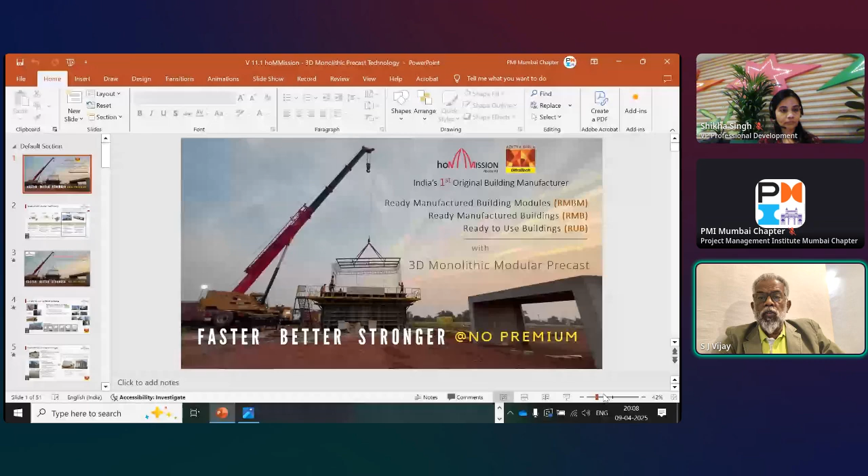Yeah, there we go. So like I said, my name is Vijay, and I am part of this company called homMission India. Those of you who are able to see the tiny font underneath that, it just says two words: it says 'abode all.'

Essentially, we believe someday we should be able to manufacture all types of abodes and ensure the people, or the activities, or anything else that happens on earth will have an abode which is manufactured, intelligent, etc., which you will see as we go forward in the process.

When we started this in the country, in India, we were doing this from 2010 onwards. In 2010, it was only effort, study, comparison and research as to what kind of manufacturing technology would work for the Indian market. Those of you from the construction industry will immediately know that if we talk about manufacturing buildings, we only have three options as of today. In 2010, we had only two options.

The two options were either what is called prefabrication of buildings or precasting of buildings. The difference is that in precasting you use concrete, while in prefabrication you use metal, timber, or any other material. These words are used interchangeably in some markets, and even precast is referred to as prefabricated. But we differentiate by saying if it is concrete, it is precasting, otherwise it is prefabrication.

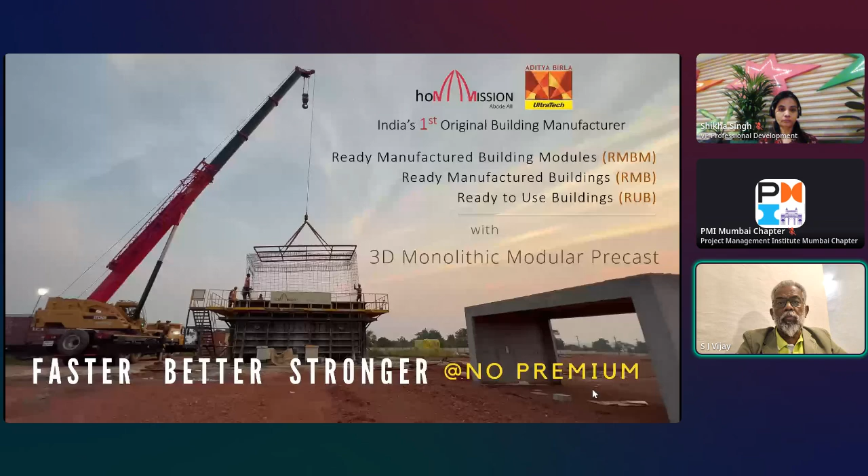So whatever I have told you is only level 3 and level 4, as you can see on the screen. The construction industry has been evolving from using raw building material, mixing them at site, making the walls and adding the roof, etc., until about the Second World War time, or until the invention and usage of reinforced cement concrete.

That's what people were doing. Even when cement concrete came, it was still site mix, done manually with available labor. Then, historically, came the Second World War - things being bombed by the enemy made it compulsory that construction had to be precast or manufactured. So it triggered in European countries, particularly countries like Finland, which became leaders in precasting.

You can make multiple wall panels, columns and beams, and join them together - we call it segmental or 2D precast. Now, whatever I told you in the first slide itself is level 3 and level 4 - that is exactly what we do as homMission in India. We call it homMission. The mission is to make a home available not only for people, but for activities, industries, airports, whatever.

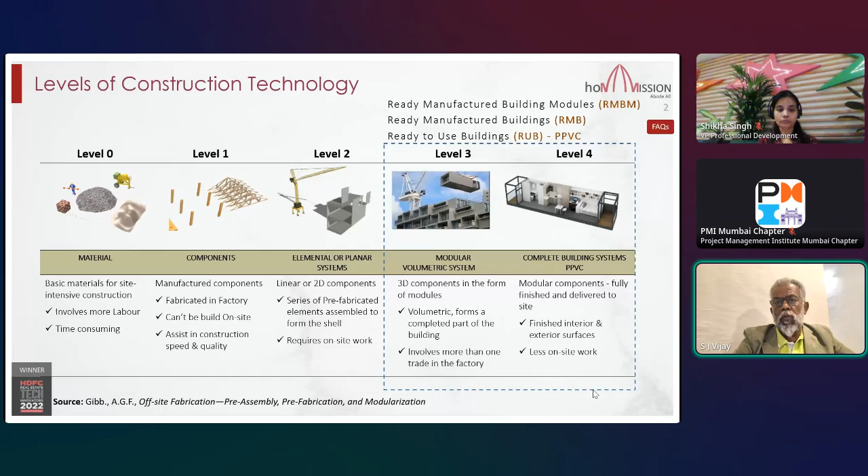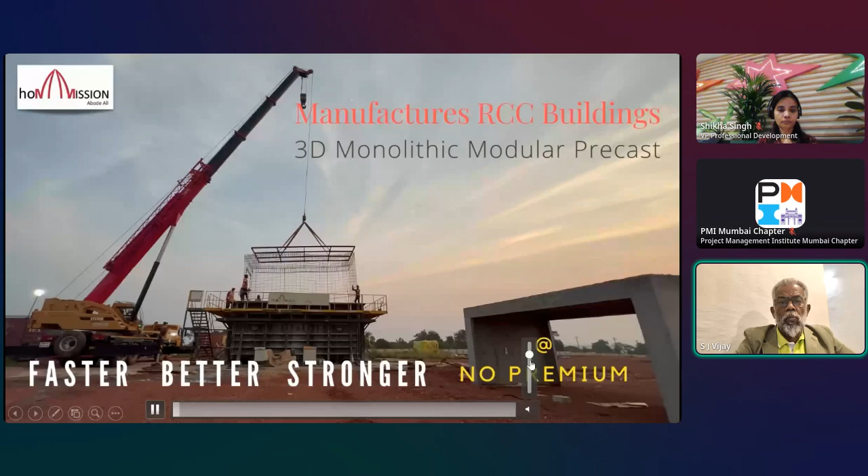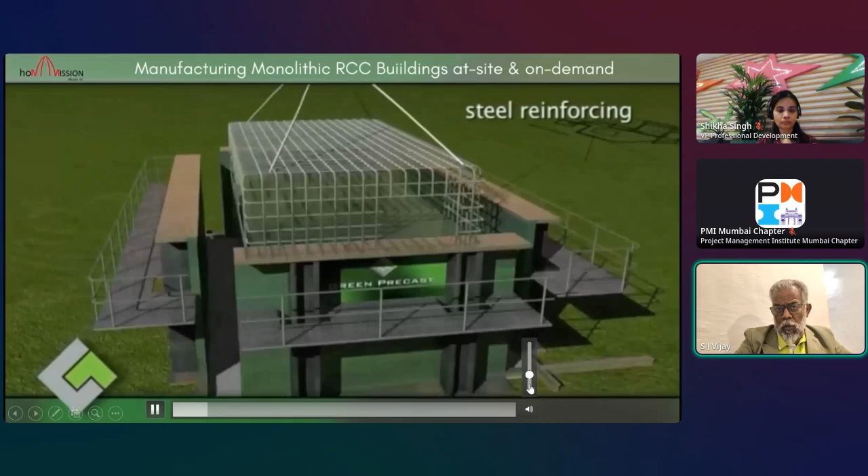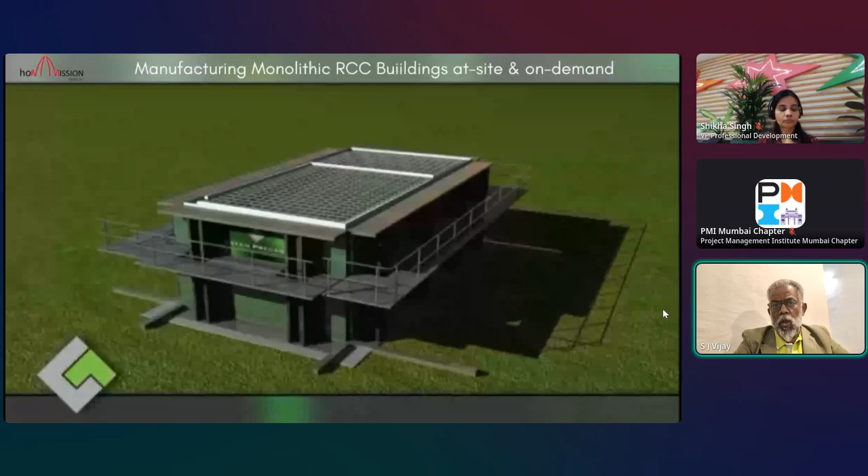So as you can see in the picture, this machine which manufactures the building can go to the site - that's the big machine. Push a remote control button, all four doors open. You lower the reinforcement cage and put in all the mechanical, electrical, plumbing conduits and wall boxes, whatever has to be in the room, including a fan hook if required. Check against the drawing, put all of them in, push the button, close the machine, pour the concrete.

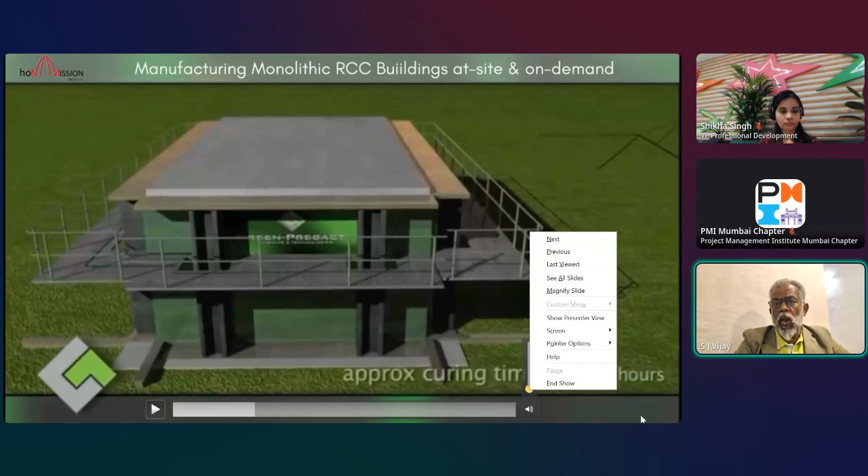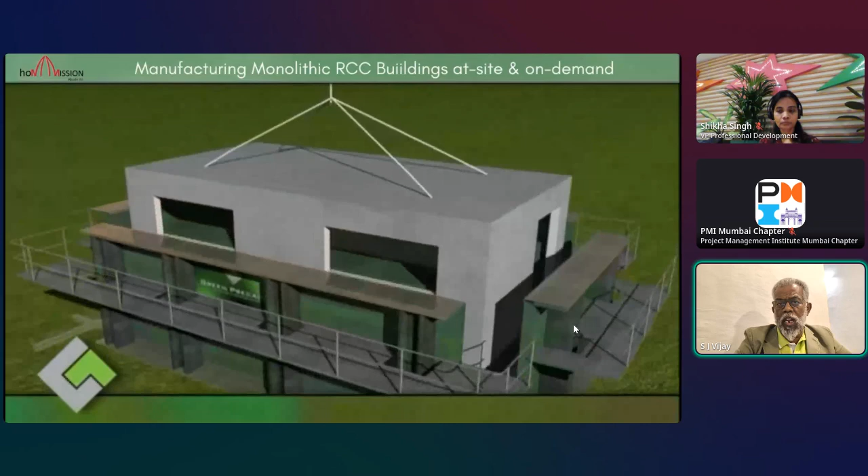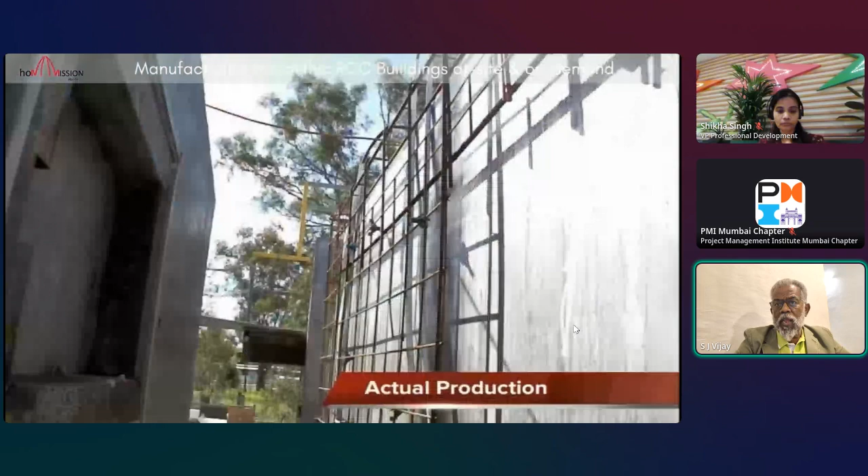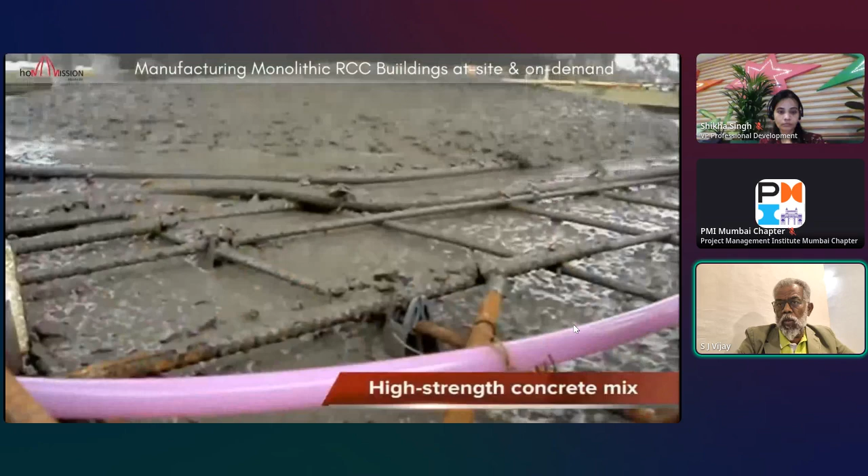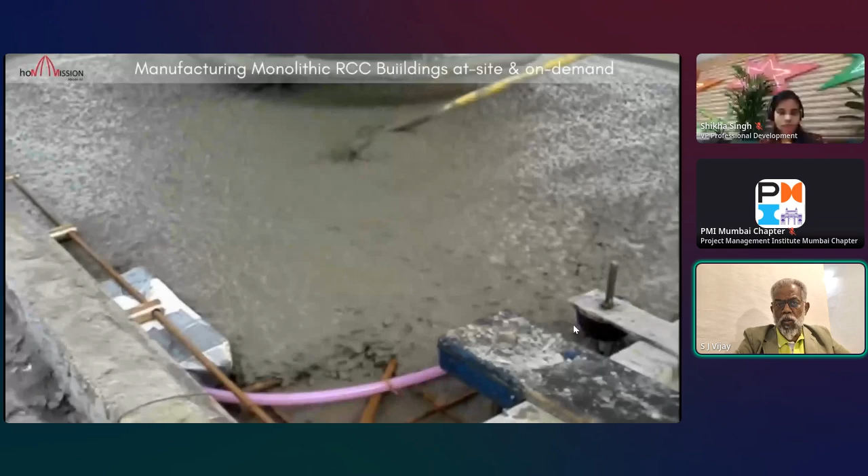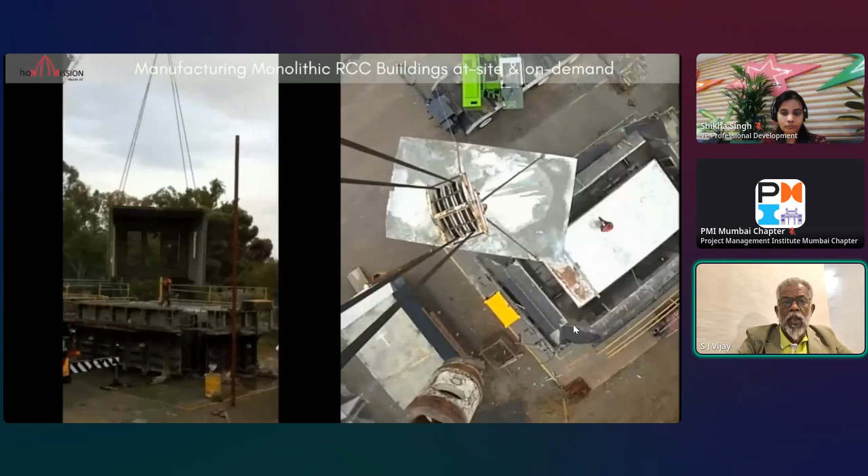On the left hand side, you can see if you need a larger space, we can keep one side of the module open, join two of them together to get double the length. So we have applied these things.

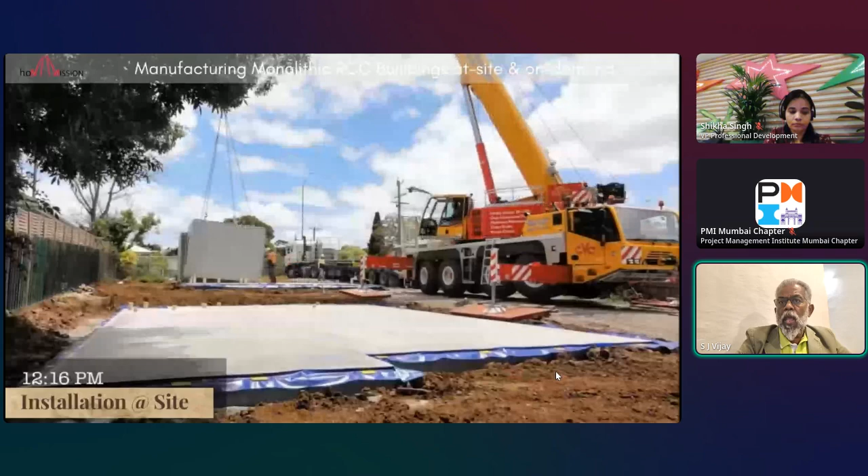Now that is manufacturing, this is about erection. How quickly can you erect an RCC building? 10 modules, roughly 3,500 square feet in total, about 5 hours and some minutes.

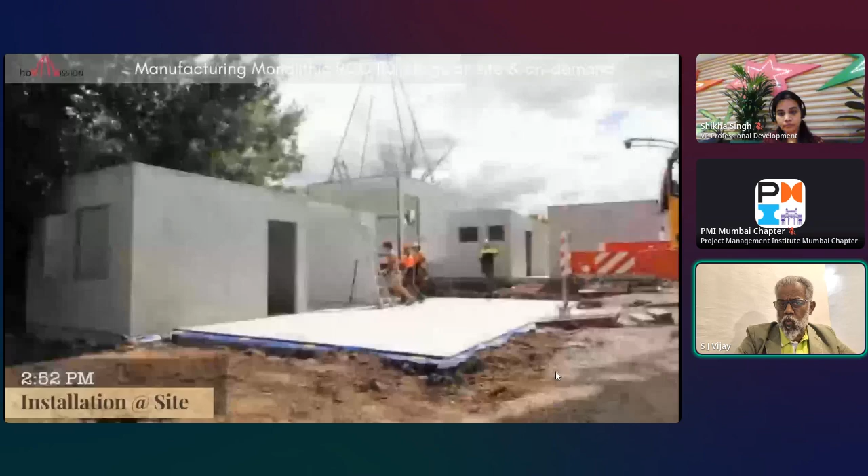This is a video clip of how it was done in Australia. This includes the structural connection. This is India's first building, 5-story, 20 apartments, built in 33 days. This is a large conference hall, done with one machine. This was done for the new Goa airport. So this is a quick 1 minute snapshot of how it is done.

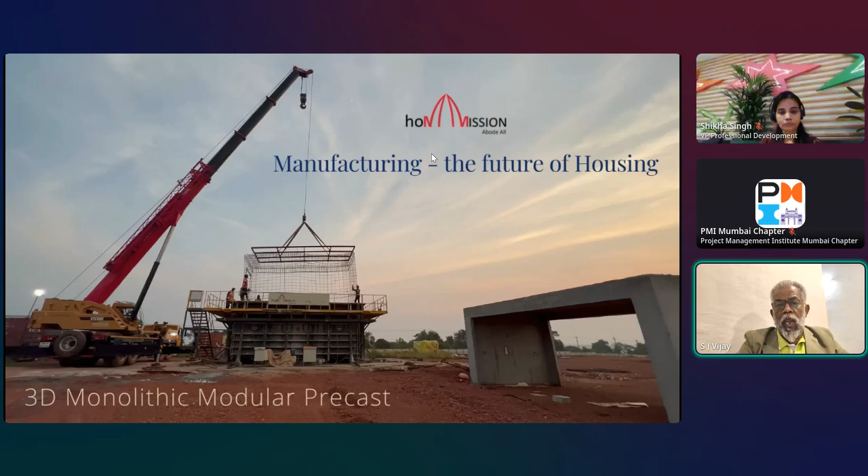All this sounds great, but the fact of the matter is it may have been in use in other parts of the world since 1997. Singapore made this technology mandatory in 2011. All this is fine, but in any country, when you bring a new way of creating a space, it obviously has to comply with the National Building Code. It has to be studied for the local geoclimatic conditions and the seismic forces.

So that took, in 2016 we did the first building. It took us about 3 more years. Government of India set up a committee which involved CPWD, Central Public Works Department, Indian Institutes of Technology, Central Building Research Institute. That committee said it is the same steel, same concrete, but I need to check the structural connections to ensure it is safe.

So what you see on the slide on top is the entity which led all this effort and approved this for use in all types of buildings, manufacturing all types of buildings and all heights of buildings in all seismic zones up to seismic zone 5. This is in the public domain. I've added it in the presentation. You can take a look at the circular issued by the Government of India.

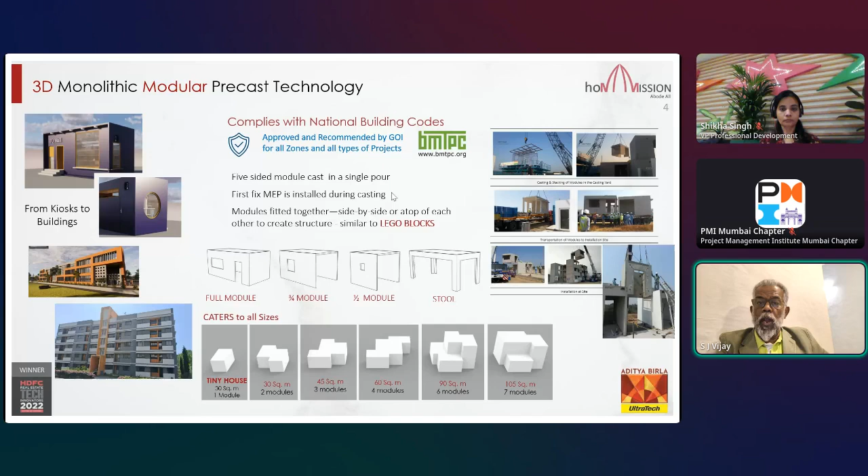We will go into the micro factory, how we modularize the factory also. Next one, Sunil, please.

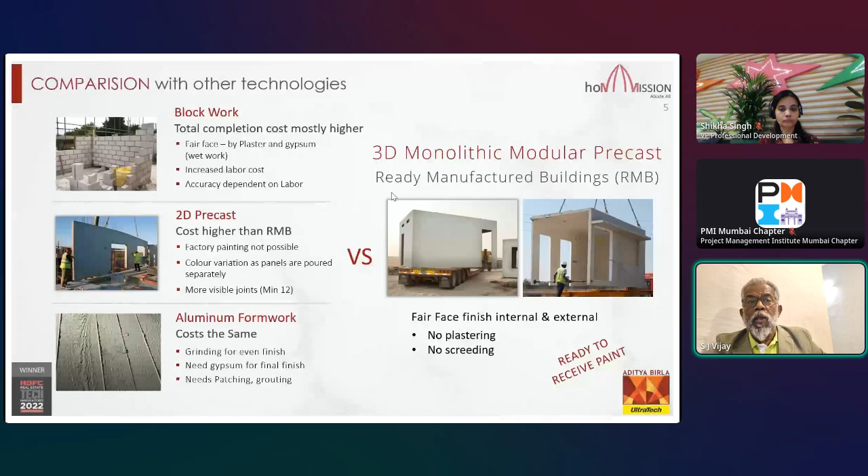So, let's go to the next slide, please. So the question is, what small rooms can you manufacture? How do you manufacture a large room or a conference room? You can see this is a

1,716 square foot single conference hall. Those of you with a sharp eye would have already noticed, if you look at the picture in picture, these were manufactured as standalone modules, all from one machine, over 6 days of production. As you can see, it comes with wall boxes, and later we draw the wire. 6 boxes manufactured over 6 days from one machine, joined together - that is your conference room sitting in front of you.

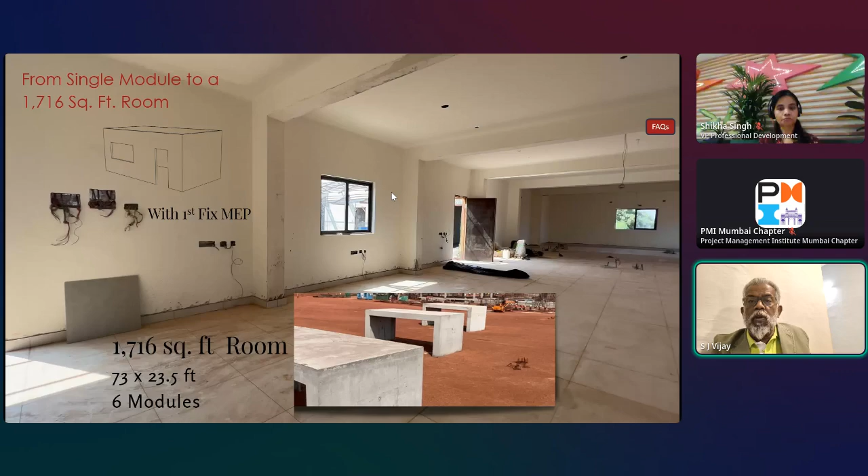Next one, Sunil, please.

So obviously the question is, this is all fantastic, but if you say I'm going to manufacture this at your site, how much space is required? For manufacturing 300 square foot, one machine plus steel processing plus holding takes 2 days of production. For all of this, if you see the left-hand box, we need 20 meters by 20 meters of space. That is why we call it a micro factory. In a 60 feet by 60 feet space, there's a building manufacturing factory that sits at your place and manufactures

whatever you need. But if you say I need 1,000 square foot every day, then you can see there are 4 of them sitting there with a gantry crane. All of this is mobile - these molds come on the back of a trailer, come to your site, do the factory work, get back on the trailer and get away. That is why we call them mobile micro factories. So now let's go.

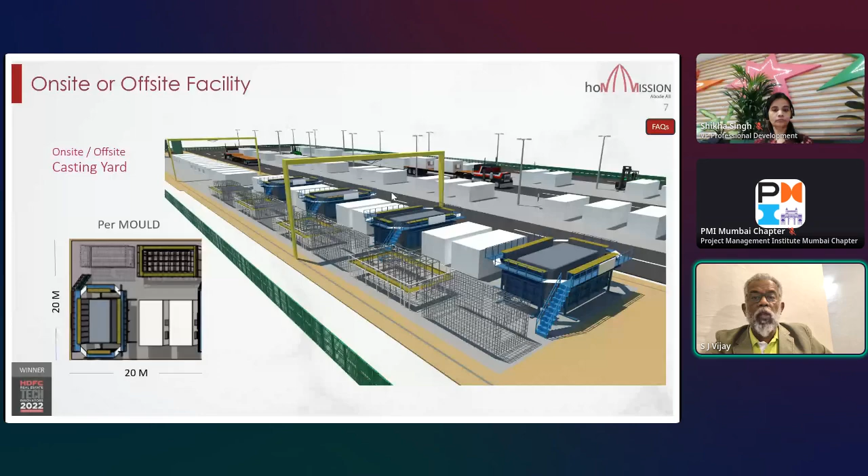So this was India's first building, I told you, for Tata Housing near Mumbai in a place called Boisar. This is a 5-story building, 20 apartments. As you can see, done in 33 days. This was done in 2016. This is what was the trigger for doing all the subsequent projects you will see.

Next one, Sunil, please.

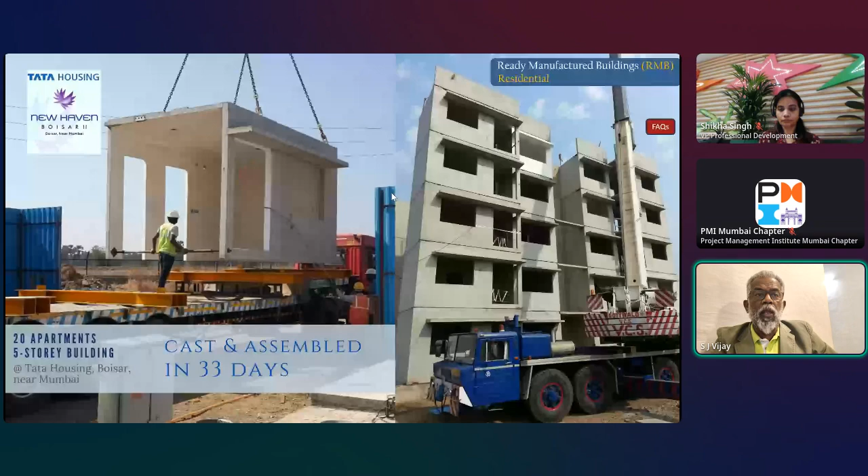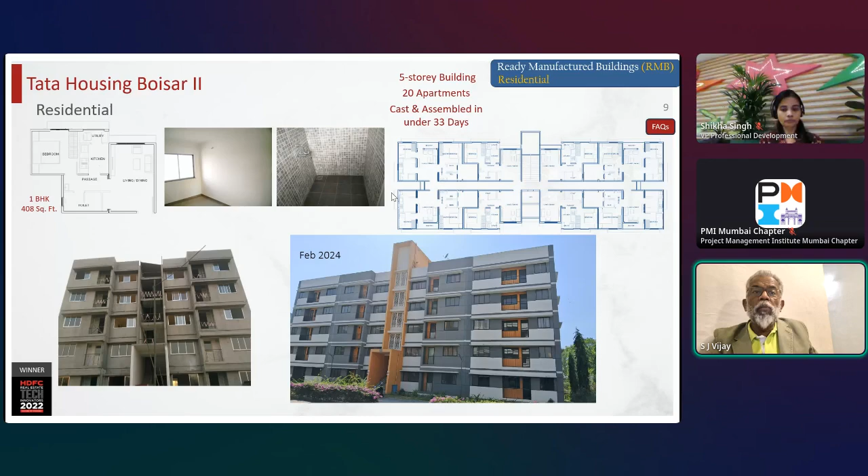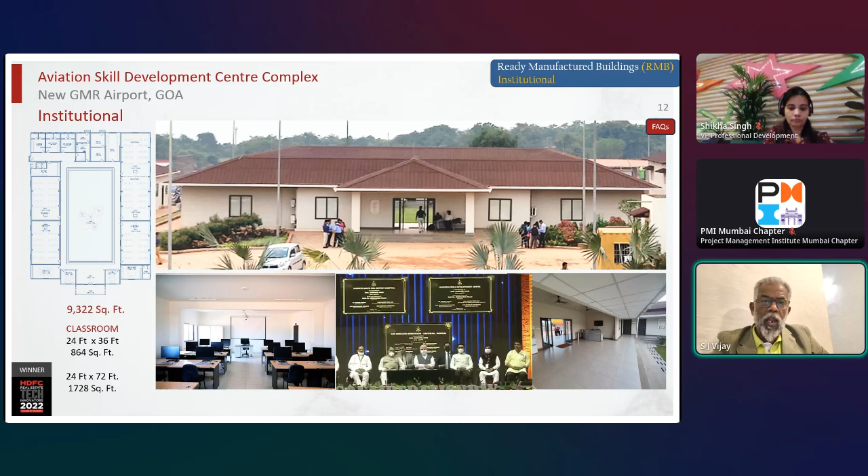That is the kind of speed we are talking about. Now you can see the quality. If you are going to Goa anytime, please, it is inside the airport itself - take a minute and just walk through, because this was delivered and occupied in 21, and it has been used since that time.

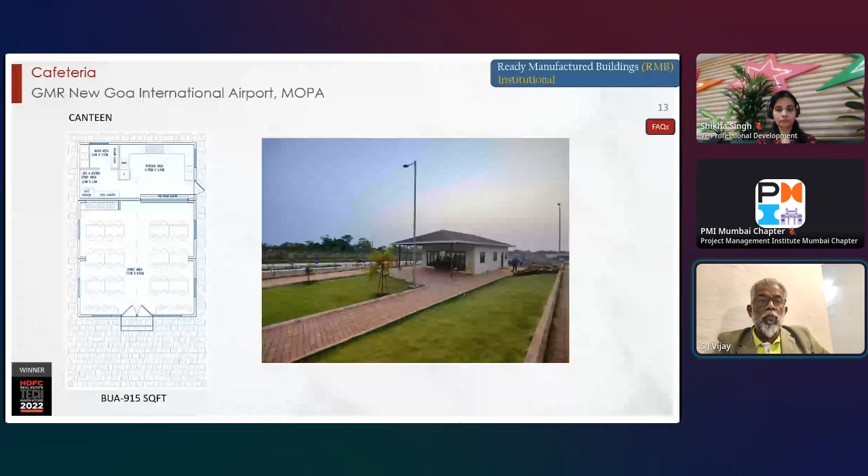This is the cafeteria building - like I said, 3 days. The drawing is there showing how 3 modules plus an extension of the roof, because in Goa it is mandatory to have sloped roofs. That was added, which took more time than the 3 days of work.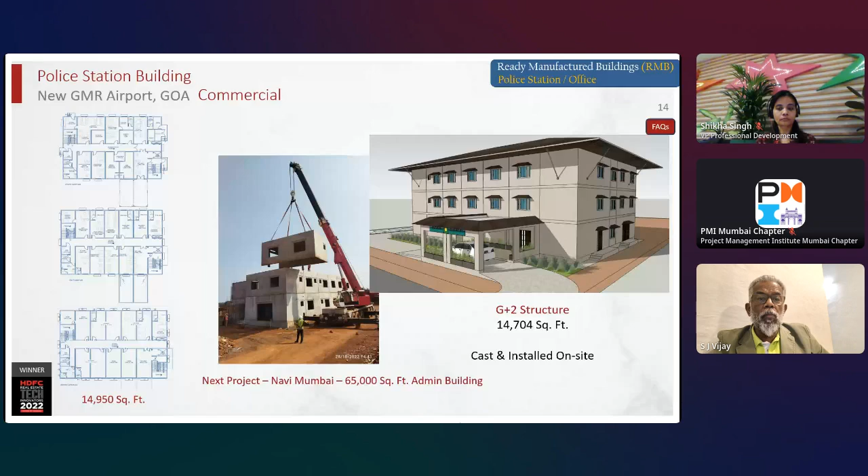As you can see, this building was inaugurated by the Chief Minister of Goa. His question was, the lockup cells and jails and all are there, but why is it looking like a 5-star hotel? The reply from one of our engineers was, 'Sir, the machine doesn't know - it just makes the same thing again and again, and a police station also can't look like that.' That was a kind of testament for us as far as fit and finish and quality is concerned.

So why not offer these kind of homes, ready-manufactured buildings as a product to individuals also - not in Mumbai, of course, because in Mumbai nobody can afford to own a plot of land. Elsewhere in the country, we have now released this for individuals who can.

There is an app - we have a strategic alliance with Ultratech. If you type capital UTEC, UTech, you will see that app, on Android and iOS everywhere. Get in, just put your plot's Google coordinates. Within 48 hours, 2 days, you will get a plan which is as per local regulation, which you can fill. If you want a 3D plan, you have to wait 1 more day - 2D plan is 2 days, 3D plan is 3 days. And if you want to go with the VR files, they give you the VR file. You check details of what color paint, what tile, and sign off.

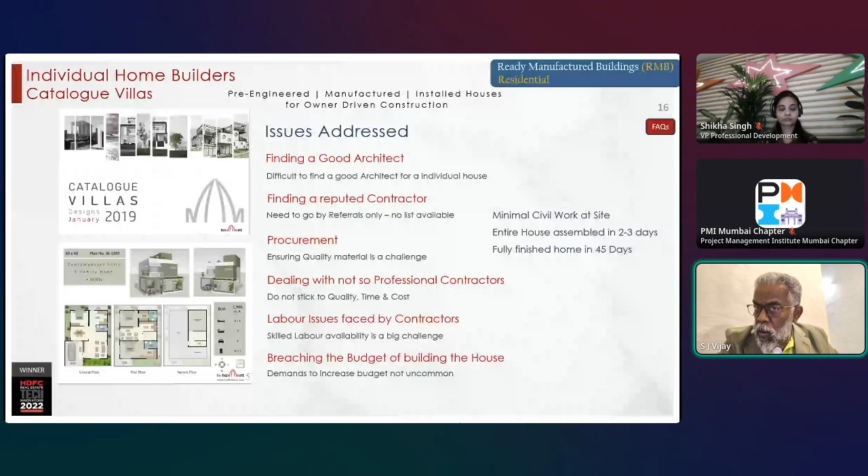This is being offered right now only in Bangalore, but it is expected to go to different locations. Ultratech has about 400 locations where they manufacture ready-mix concrete. So the ready manufactured building is the logical next step from ready-mix concrete.

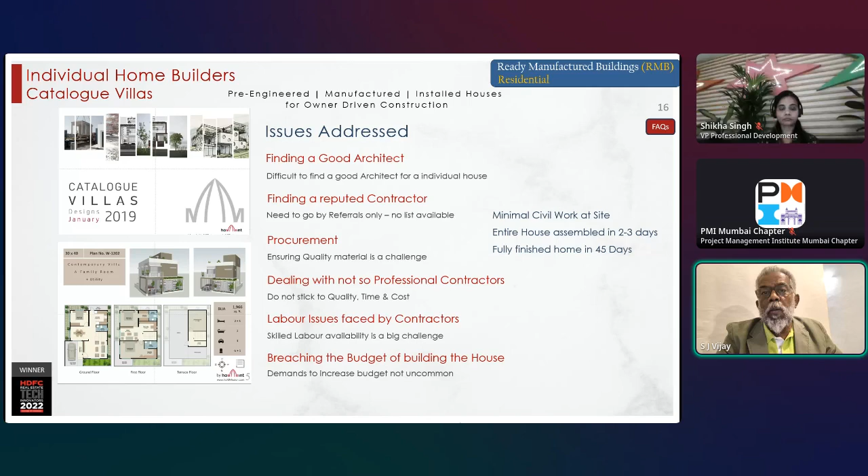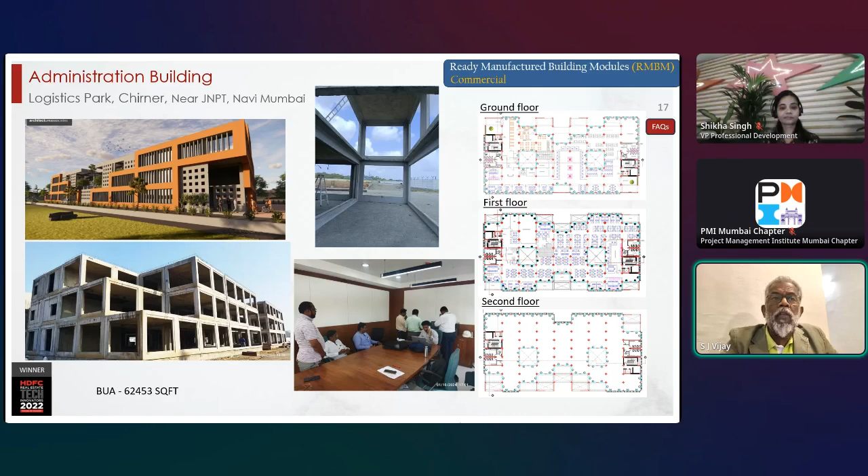Then came the Indian Air Force. They wanted a building, which of course we can't show you - this is in Bangalore. This was 35 days of production. Let's go forward faster.

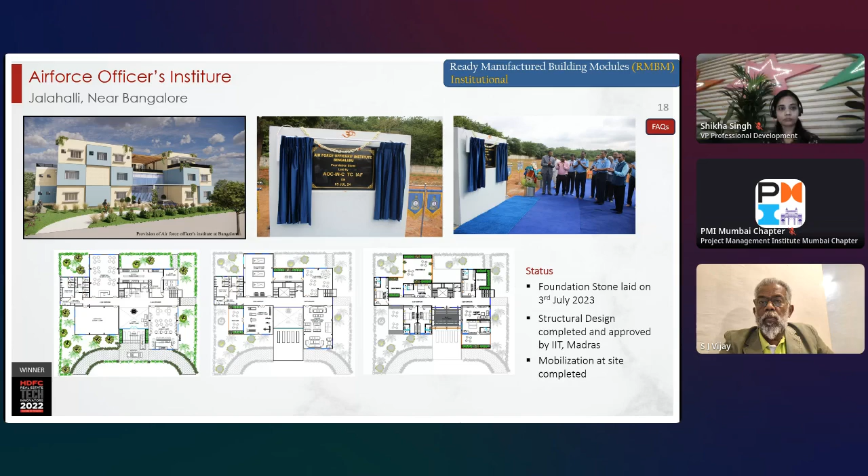So this is a very interesting challenge they threw at us, saying Malaysia can happen, Singapore can happen, Australia can happen - look at those countries, the road conditions, the material quality. All that can happen, but in India, with Indian roads etc., I don't think we can manufacture a building as a product and take it on a trailer to different locations. So instead of arguing and explaining, we decided, when we were doing the Goa airport, to manufacture a bungalow of about 1,800 square foot, put these modules on trailers, drive through the Western Ghat roads, come to the national highway, bring it to Bangalore, put it through structural engineering tests and erect it in Bangalore. It is a stupid thing to do as far as transportation cost is concerned, but we had to prove a point that Indian roads are not too bad, India is not too far behind, and what is done elsewhere can be done here too. So this is an interesting, expensive exercise just to prove a point we had to do.

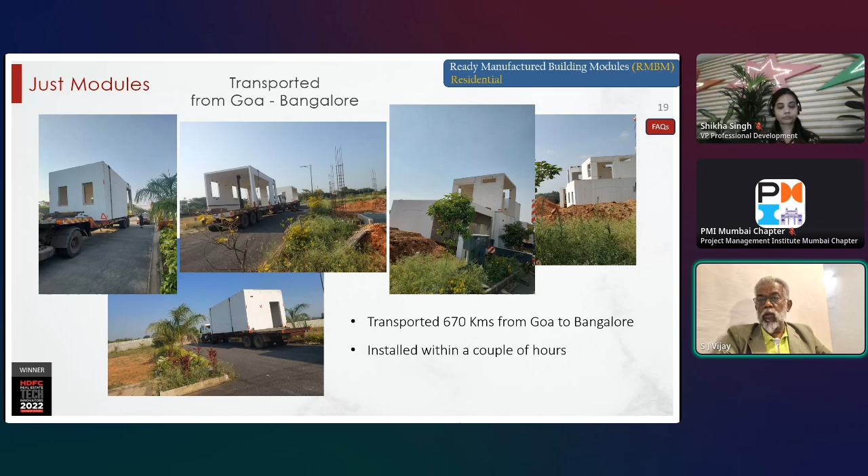This bungalow is in Bangalore. Any of you guys who want to see it, we can coordinate with the owner. Next one please, Sunil.

Then ITC came to us saying, sir, we have a new project coming up in this place - can you manufacture washrooms? Until this time we only had the walls, roof and floor, which were all M40 grade, so no challenge there - the strength was proven. This time I had to put the wash basin, ceramic items, wall tiles, and deliver a ready-to-use room where you only plug in the power, water and outlet.

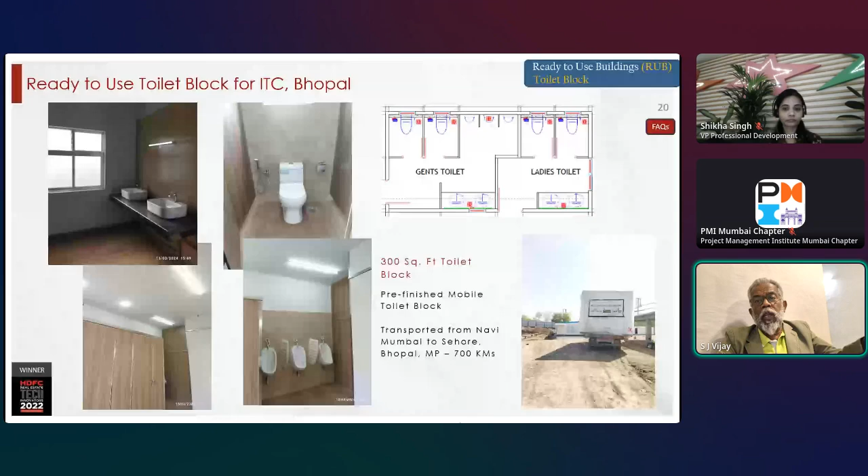This had to be manufactured in Navi Mumbai and sent all the way to a place called Sehore, near Bhopal, 700 kilometers away. You can see it standing on the trailer - the lower corner picture is that. We delivered it, and then they asked for more, from Navi Mumbai to Chandigarh. It went - they picked up the transportation cost because they were in a hurry and willing to pay for it. So this became a new product line for us. Sunil, next please.

Then came the Air Force, challenging us, saying for our army people, can you make a one-bedroom hall kitchen, fully fitted out? You manufacture it in your yard, bring it to my training headquarters in Bangalore, and in front of our officers you have to do the fitting, finishing and air conditioning - all this, because our chief of Air Force will come on this date. So 96 hours was the time given.

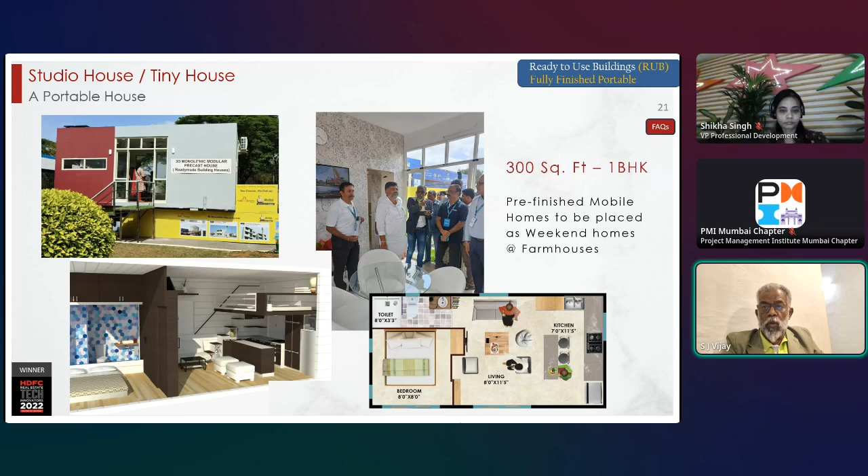This is what - in fact the left side picture you see is actually mounted, sitting on a trailer. We have hidden the trailer with those banners, so it sits on the trailer and goes from place to place. This is a studio house, one bedroom hall kitchen - take it where you want to go. That's the mode that got us the earlier project I showed you, the Indian Air Force project. So next, please.

Then came the request to manufacture a radar building. The footprint of the building is 500 square feet, the height is 7 stories, and it had to be completed in 14 days, as per the standards of the Airport Authority.

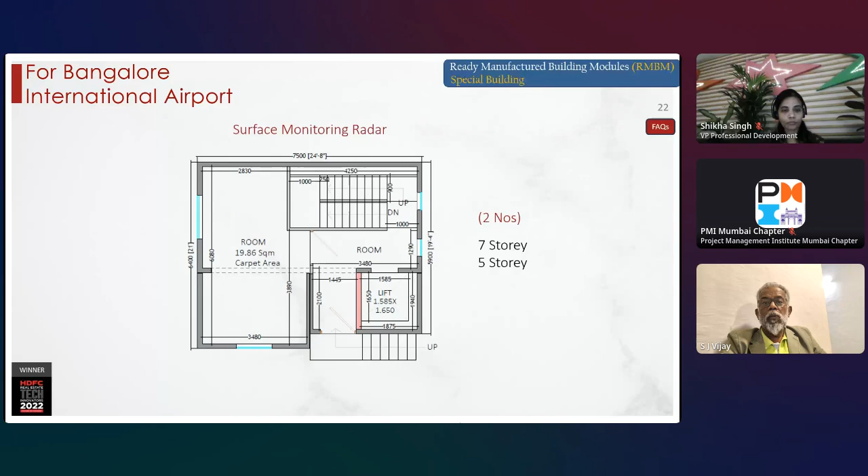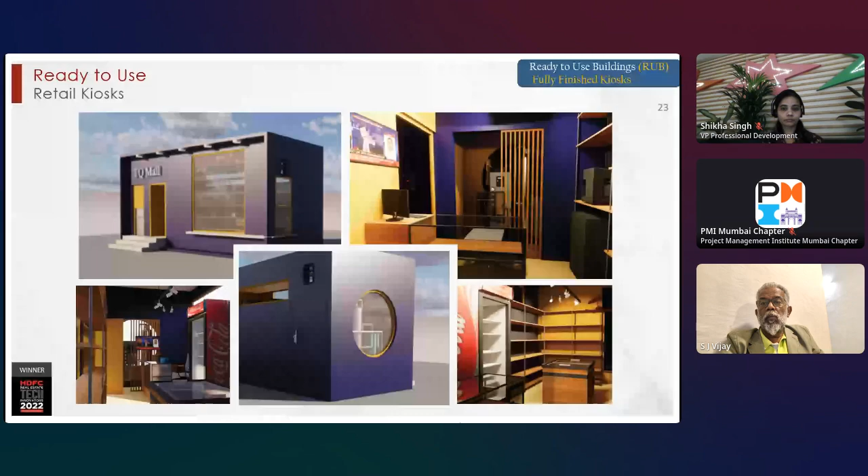These are all kiosks, which we already talked about how we manufacture.

We are already at 48 minutes. So I spoke rather casually about all that has been done. All this has been achieved thanks not just to the technology or our efforts alone.

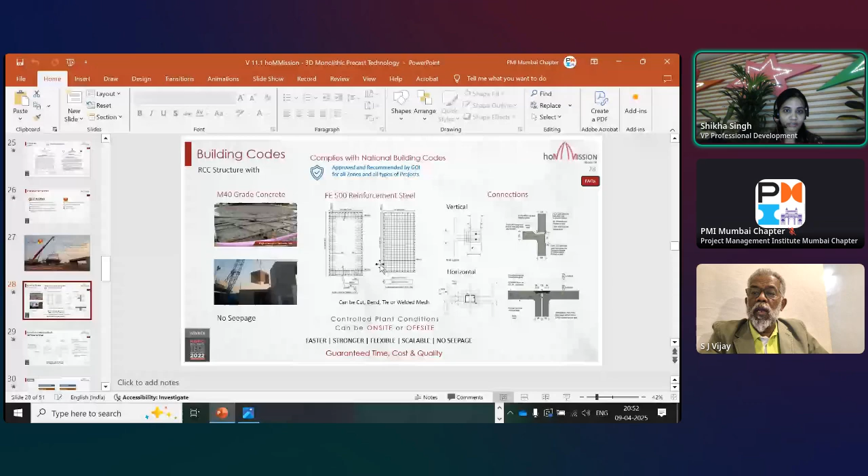He's asking, are our levels derived from BIM levels? I need some more explanation. BIM level, oh okay, I got it. What he's talking about is building information modeling - whether the levels I am mentioning are connected with the BIM level. No, no, no, no. This is purely a construction technology term, not the BIM term at all.

Second question is from Amit Auti. He is asking, how is communication management done in this case?

So communication management - what we have figured out is normally construction industry works on a sequential, one after another basis. The most common word you will hear in traditional construction is charni - this will happen, then I will come, to do the next step. But what we did, because we shifted from manual to manufacturing, from fragmented to integrated monolithic, we also removed that sequential activity at one go. The whole room should be poured at one go with all service lines installed, which means there is a very strong need for coordination right from the beginning to do design for manufacturing and assembly, involving the architect, the structural engineer, the MEP consultant, and the finishing details.